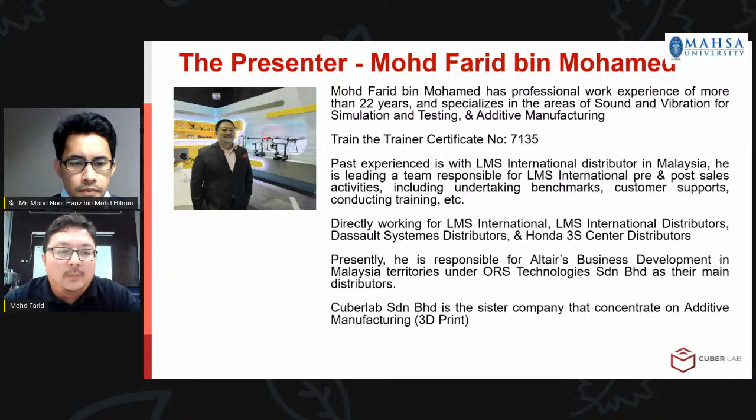All right, so I guess Mr. Hariz has already read my biodata about myself, so I don't think I need to explain much about myself already. Just a quick one, I have a lot of past experience on simulation and testing, and now on additive manufacturing.

The agenda for today is essential skills for additive manufacturing, design processes, types of analysis for simulations, optimization discipline, topology optimization, and additive manufacturing process flow, industry application, additive manufacturing design challenges, lattice structures unique for 3D printing, and another example of topology optimization and additive manufacturing.

I've mentioned there are 6 essential skills for additive manufacturing, or some people just call it 3D printing. If you look at these essential skills on the slide, one of them is conceptualization and also design optimization, which I've highlighted in blue color. The rest I'm not going to highlight. So today is more on simulation driven design, focused on conceptualization and design optimization.

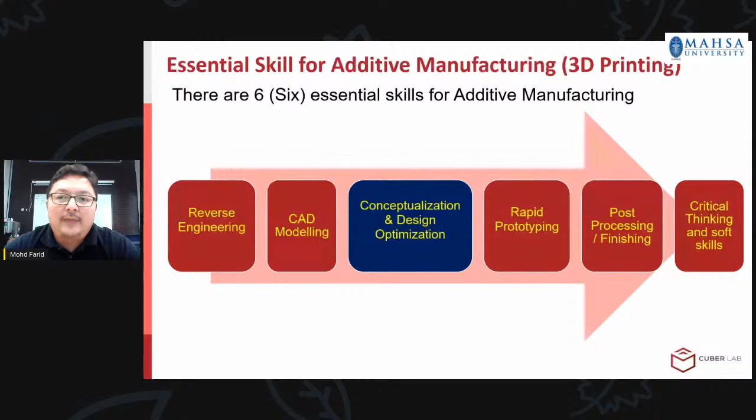Let's look at the traditional design processes. In the early stages of designing, you develop a concept - concept 1, 2, 3, however many concepts you have - and then you design that as a hand sketch, really the old traditional way. From there you build a detailed design, then go into validation and prototyping as well as documentation, a lot of paper documentation, and then you go into production. This traditional design process is a very long and tedious process because it involves designing on paper, prototyping, and real product evaluation and testing.

Just some pictures I would like to showcase, of what it looked like before we had CAD software available in the market. This is how it looked before computer aided design assisted us in designing. AutoCAD was released in 1982, and that's where we started to see an abundance of computer aided design software solutions available.

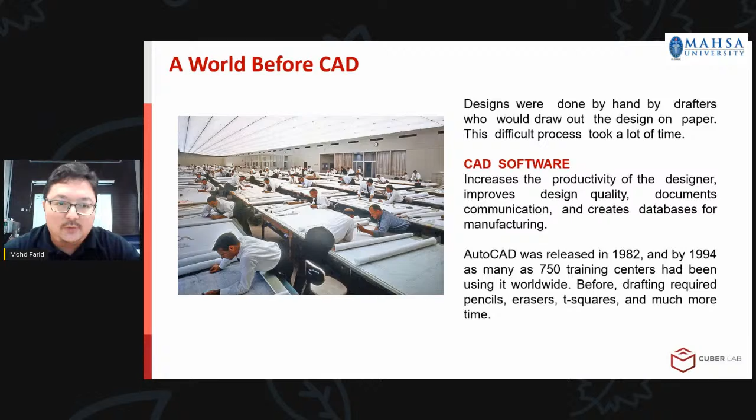I already mentioned conceptual design, so I want to give the meaning of conceptual design. What is conceptual design? It is an early phase of the design process in which the broad outlines of function and form of something are articulated. It includes the design of interactions, experiences, processes, and strategies. Common artifacts of conceptual design are concept sketches and models.

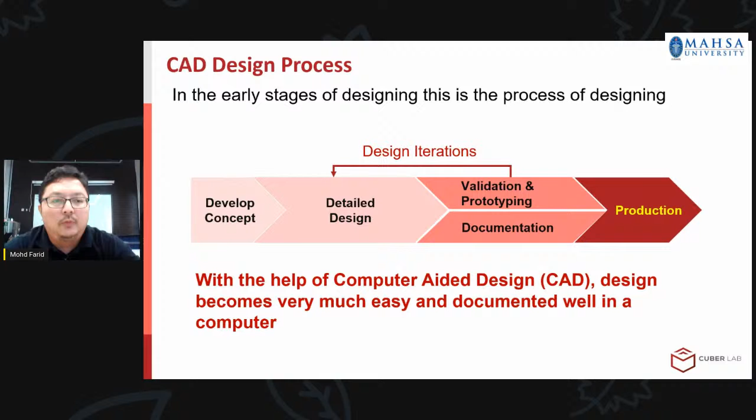Now what is computer aided design? Computer aided, the word already makes you understand it's aided by computer, and design means you are designing in computers. So that's what computer aided design is about. You also have what they call computer aided industrial design. These are two different entities, but it's the same thing - you are doing design. One part is parametric modeling, the other part you just do freehand sketch.

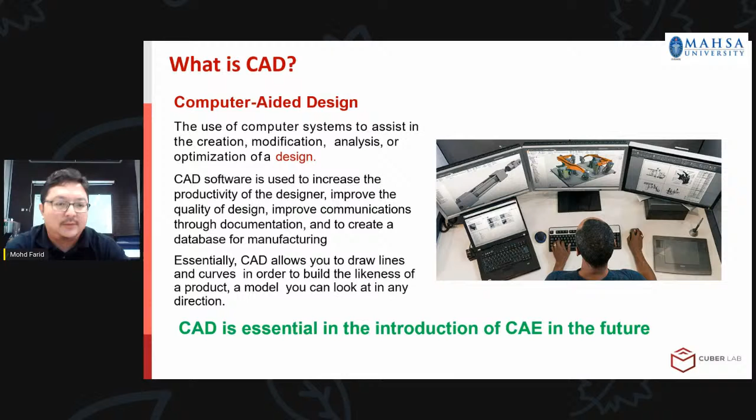I highlighted that CAD is essential in the introduction of CAE in the future, because when you have the soft copy of your model in your computer, you can use this model to go to the next level, which is computer aided engineering, where you do your simulation and analysis to find the result of your product - is it going to fail or is it going to pass? I'm going to explain more about CAE later in a few more slides.

So I'm going to show you the process of computer aided engineering design process. I already showed you the CAD process - now it's the CAD and CAE process. If you look at it, the design iteration is still available there. Let me use a laser pointer - you see there's design iteration here. So from development, concept goes to the detailed design.

This is in CAD, and then you want to validate, so you go into CAE. If you're not happy with the result, if it fails, you go back to detailed design, redesign it, and go back to CAE and do your simulation until you get the right or passing mark for the model. Then from there you go into prototyping and validation - validation is more on the testing part of the design process. Documentation is where you keep your files and result files in your computer. Once you're happy with this, you can go into production.

So what is computer-aided engineering? I've already mentioned computer-aided is aided by the computer, and engineering is more about doing simulation and analysis of the product that you have already designed. A typical CAE process comprises pre-processing, solving, and post-processing steps.

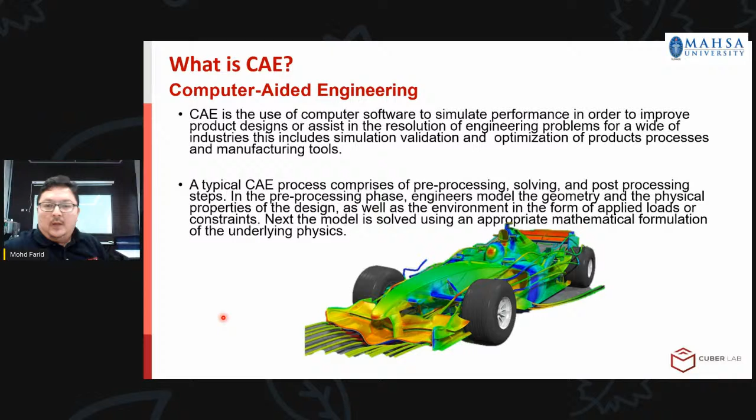Next slide - I want to highlight finite element analysis. There's a little bit of difference between what CAE and finite element analysis is all about, but most computer-aided engineering solutions use finite element to do their own solving, except for typical multi-body simulation, which doesn't need finite element analysis at all - meaning you don't have any mesh for your analysis.

If you look at it, finite element analysis is a numerical method for solving problems of engineering and mathematical physics, based on the idea of building a complicated object with simple blocks, or dividing a complicated object into small and manageable pieces. It's useful for problems with complicated geometries, loading, and material properties where an analytical solution cannot be obtained. Finite element results are validated with either analytical solutions or experimental studies.

FEA process overview - I want to show you the process of doing a finite element analysis. You can see on the right slide here the analysis type, the material properties, the loading, the boundary condition, and also the mesh generation. These are the steps.

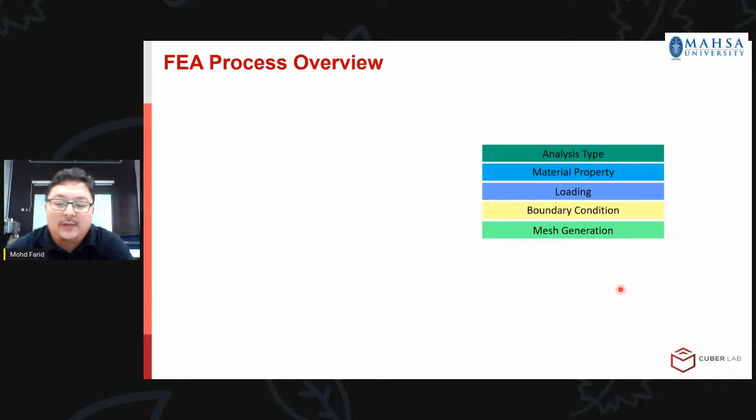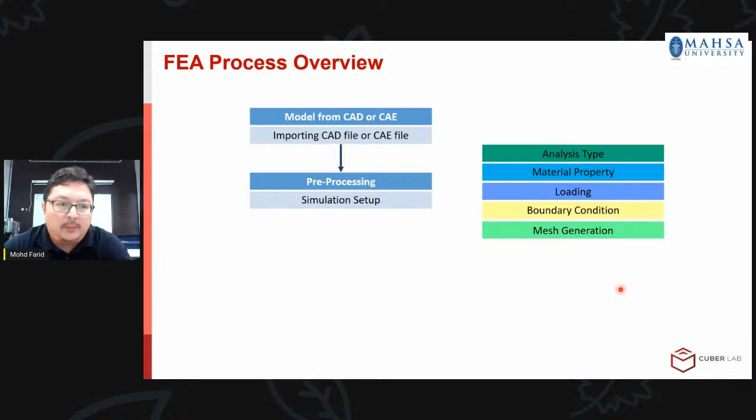You import your CAD model, or your CAE model, into your finite element software, and this will be the pre-processing simulation setup. Then you go into solving - you choose what type of solving you want: linear, non-linear, explicit, non-explicit. Then you do post-processing, and you look at your result.

So in that pre-processing, again, I already mentioned the analysis that you want to do - you want to do static, linear static, linear dynamic, heat transfer, CFD, and whatever.

Then you put in your material properties, your loadings, your boundary conditions or constraints, and then you actually go for the mesh generation.

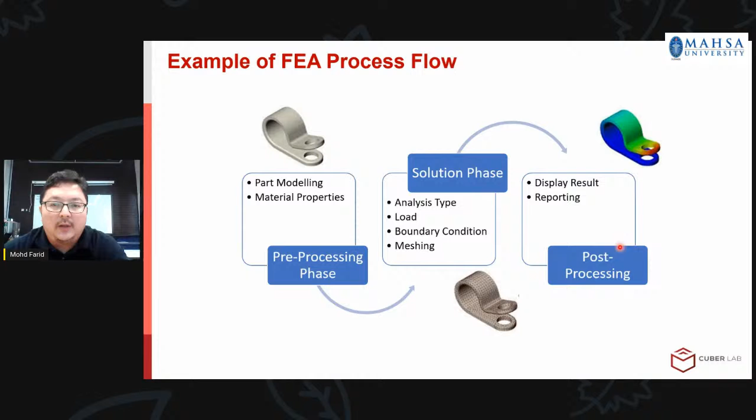Example of an FEA process flow, as shown in the previous slide. This is roughly what you can see: you put in part modeling, material properties, the solution phase, all the loadings and boundary conditions, and conduct the meshing. Once the result finishes running, you can display the result and do your own post-processing and reporting.

But roughly what it will look like is something like that in your head, while you're figuring out what you want to do with the model you are analyzing.

I've already mentioned the types of analysis. The only one that is not using finite element is motion analysis, or multi-body simulation. The rest, I would say, mostly use finite element analysis in their CAE process.

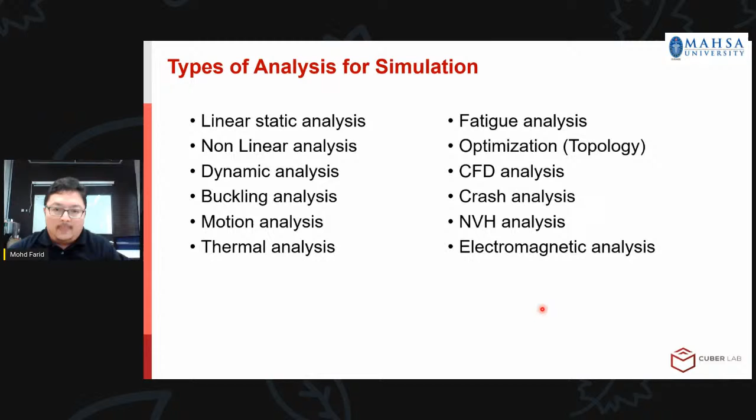Now let's go to the simulation-driven design process. With the introduction of topology optimization, the flow process is somewhat the same, but inside this design iteration, when you use topology optimization, you do not need to think about how to design your product. You can make a big block and then run topology optimization with the constraints and loading that you put in.

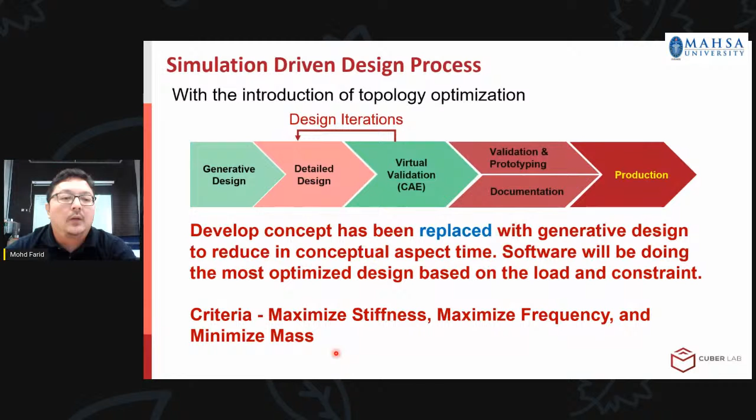The software will give you the best design for criteria such as maximize stiffness, maximize frequency, and minimize mass. So the software itself will do the job for you instead of you doing conceptual design with concept 1, concept 2, concept 3, concept 4, concept 5, and so on. With this software, you don't need to think about doing that — it gives you the best design for the loading and constraints you provided.

I want to highlight why this is essential, because of advanced users of 3D printing or additive manufacturing. If you are a basic user, you only download the model from the internet, do your slicing in the slicing software, and print. That's the basic user.

The intermediate user designs their model in a CAD software, then slices and prints. But for the advanced user, there is one additional area they do, which is optimizing the design to make it better in strength, weight, and stress. Just wanted to highlight that.

Now this slide highlights the optimization disciplines. There is a lot of optimization available in the market, but you need to understand what you are actually doing. If you look at this slide, for concept design, you can see that topology, free size, and also topography are used.

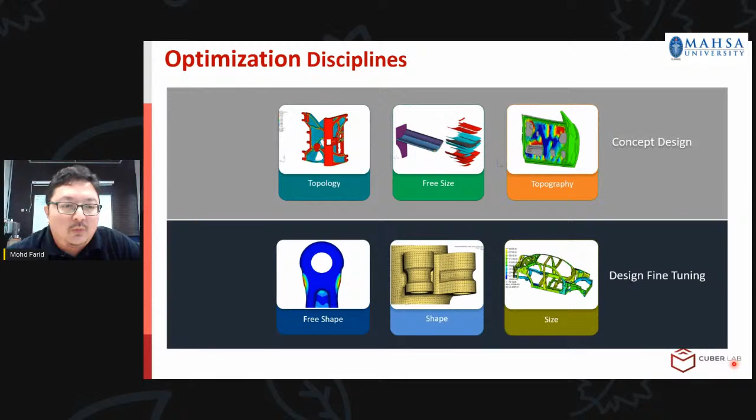As the statement goes: as a consequence of primary shape variation and continuous loading, or even due to loading alone, bone changes its inner architecture according to mathematical rules, and as a secondary effect, governed by the same mathematical rules, also changes its shape. That's what topology optimization is all about.

I've also mentioned topology optimization — what is it all about? Most simulation tells you if a design will meet performance criteria, but topology optimization creates designs that meet performance criteria. This is a very basic, simple video showing that this big block here is actually the model we want to design.

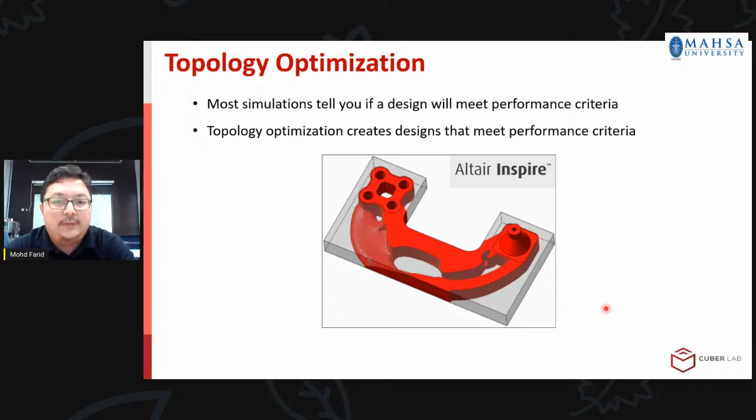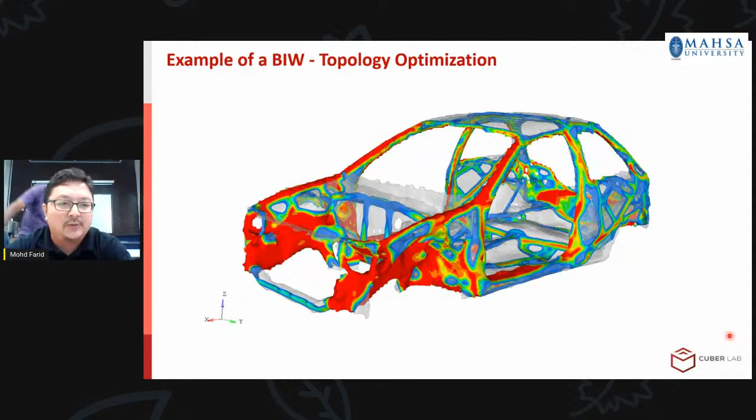Here is actually a slide just showing a sample example of a body in white topology optimization, so you can actually see how the software works. You can have a body in white, and from that body in white, you can run optimization software and get the best design that fulfills the loading condition and also constraint conditions. Thank you.

This slide here, topology optimization and additive manufacturing process flow. You can see here in prototyping, so you go for a requirement. These are the load identifications with multi-body dynamics. If you use multi-body dynamics, you almost get the real loadings instead of using an assumption loading. And then from there, the topology optimization will do the job for you, also considering all the manufacturing constraints.

And then after that, you do your polynurbs. I will not mention this slide about polynurbs in too much detail, but the gist of it is actually going into this design and making it smoother. So that's the function of polynurbs.

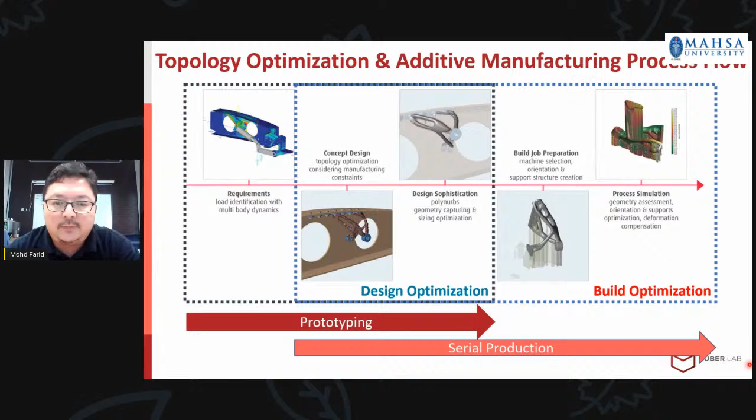And then we have, in serial production, you will see this optimization here. This is actually a picture of a 3D printed job done, and we do optimization in the solution. So there is available software that can even simulate additive manufacturing processes for metals.

And I have this video here showing the whole process of topology optimization and additive manufacturing process flow. So do enjoy.

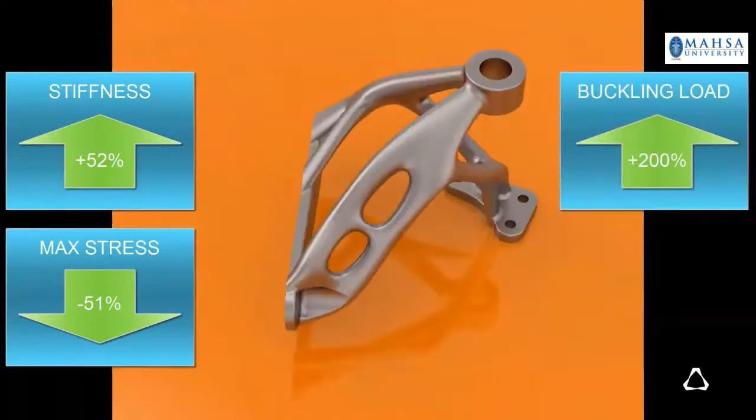Okay, a very short video of the process flow. At least you get some understanding of what you can actually do with the solution that is available in the market. All right, I'm going to go to the next slide now.

Again, topology optimization and additive manufacturing. Topology optimization inherently generates designs suited for additive manufacturing. It's good to have this 3D printer available in the market now, because I believe the topology optimization design has already been in the market for many years, probably 20-30 years ago.

But the problem is the manufacturing processes constrain all the design that can be designed. With conventional manufacturing, you cannot actually manufacture the design that you wanted. So with the coming of 3D printing, you can actually print anything, any design. Just want to highlight that in this slide here.

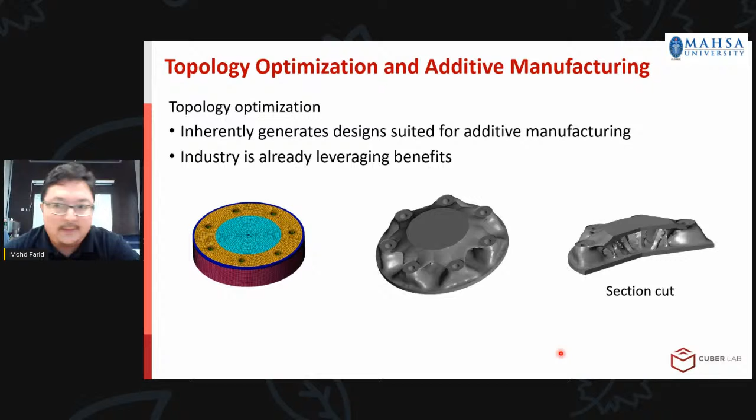All right, again, mentioning additive manufacturing and also topology optimization. You can see these are complementary technologies, right? The geometric freedom - so you have the freedom to design whatever you want instead of too much constraint on the geometry. And then it injects innovation.

That's really good actually. It also has this design individuality. So because the design is so much like nature, it has its own individuality of the model that you have already designed.

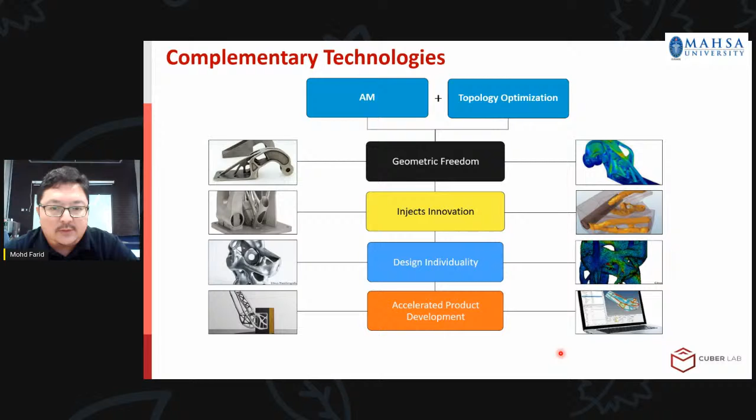And then it provides you this accelerated product development. Yes, that's for sure, because if you want to do your conceptual design, you have like 1, 2, 3, 4, 5, 6, 7, 8, 9, 10 concepts per se, let's say. That would take a lot of time to design, time consuming. So with that simulation driven design software solution, you can actually cut down on that conceptual design.

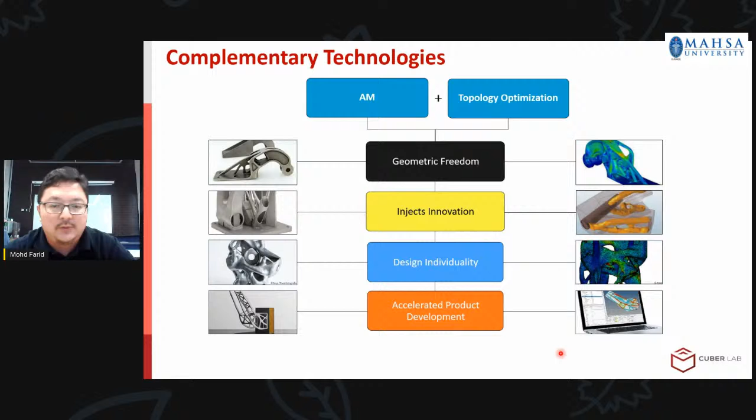All right, again, I've already mentioned the optimization solution available can also incorporate the manufacturing processes. If you look at this slide here, this is a bigger picture from the previous slide. You can see without and with the maximum member size, it will actually do a different kind of optimization design. And then we have without draw direction and with draw direction. So these are all manufacturing processes.

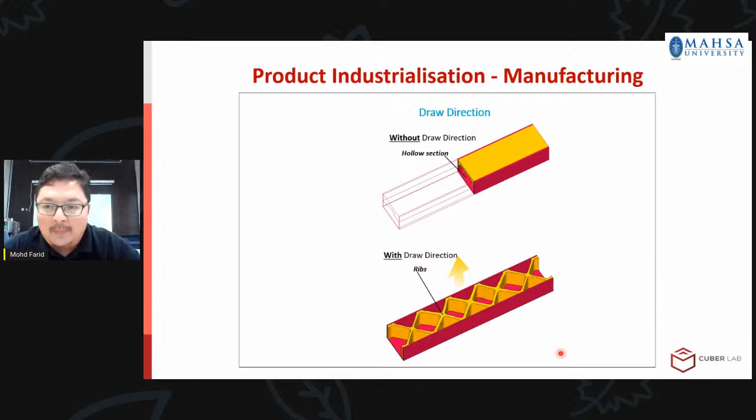And also stamping here, and also overhang angle. Anyone who has been playing with a 3D printer, this is vital - they need to know the maximum degree of this overhang angle. If not, you cannot print, you have to put a lot of support. So this red colored model here, these are all supports. The component itself is actually in gray.

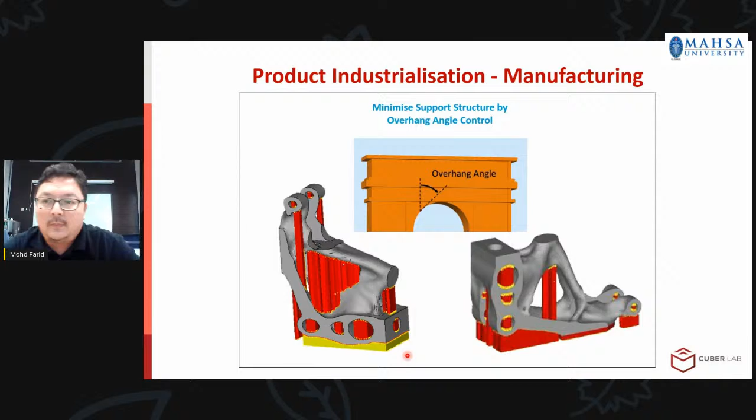Some benefits of topology optimization for additive manufacturing - again, I've already stressed this many times. You can do cost reduction via reduced part count, reduce your cycle time, reduce your weight, reduce your cost. Rapid prototyping and testing also reduce because you don't have too many conceptual designs. Many companies are already leveraging the technology and expertise in topology optimization for additive manufacturing.

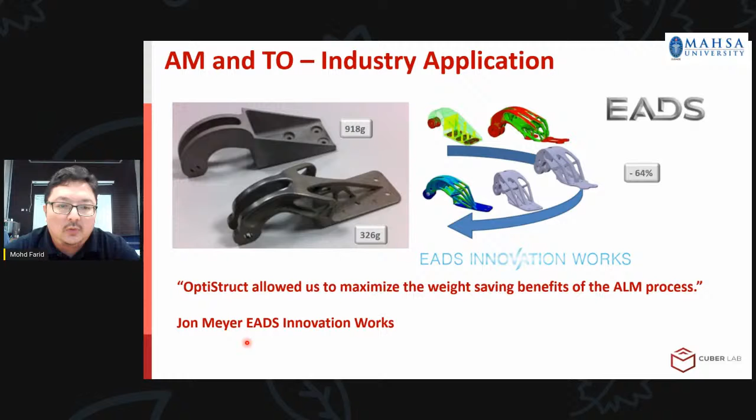I'm going to show you an example here. This is from EADS - if you look at it, AM and TO. AM stands for additive manufacturing and TO stands for topology optimization. You can see here from 918 grams to 326 grams, that's a reduction of 64% of the mass. It says OptiStruct allows us to maximize the weight saving benefits of the ALM process - this is from Jon Meyer, EADS Innovation Works.

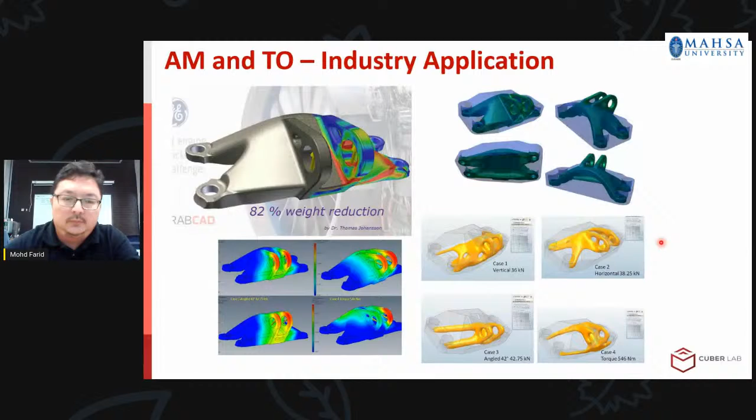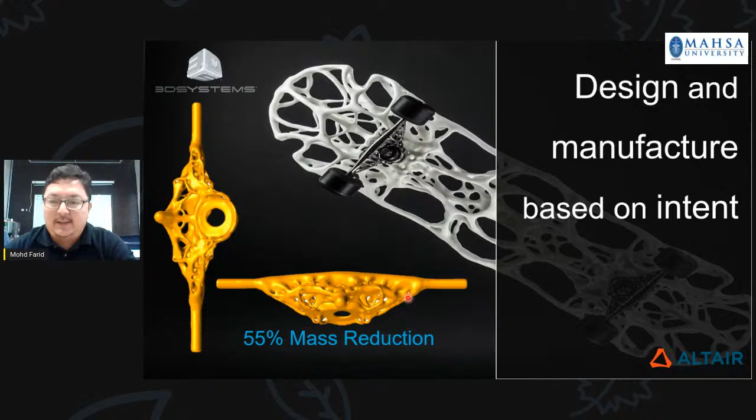That's another example. I'd like to show this next slide, because this is something - when I was young, I used to skate, so now they have a new design of a skateboard. Very nice. If you look at this slide, it says it has reduced 55% of the mass of this skateboard. Let's see this short video, I think it's only probably one minute plus. So enjoy.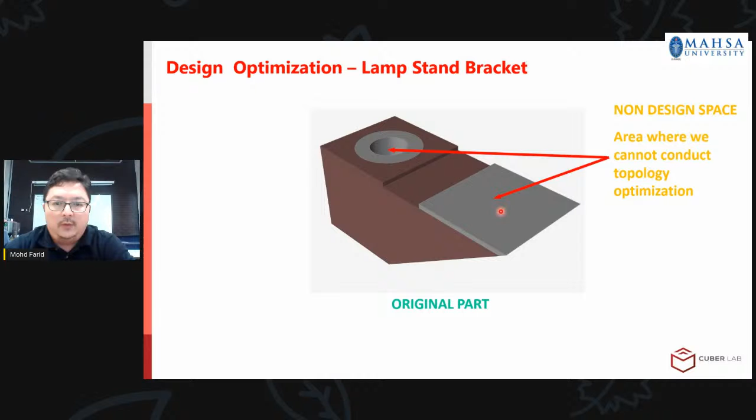Okay, first things first, what we need to do is simplify the part. Inside the software available, you can have your own CAD software available as well, that you have to simplify the model. Simplifying it by doing a very simple model design like a trapezium here, where you define this non-design space - this is where you put your constraint and your loading, those are the areas where you cannot remove material. And the design space, this is the area where we can conduct topology optimization - the brown color is the area that can be reduced.

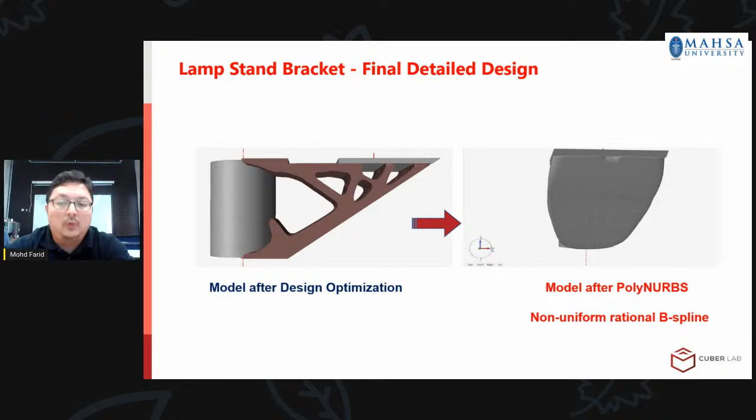So now I can mention what is NURBS. Actually, non-uniform rational B-spline model. So this is what happened.

I've already redesigned the bracket, and from that bracket I reduced the maximum displacement magnitude by 50%, and I also reduced the mass by 10%. The goal wasn't to reduce the mass because it's still light. My goal was to make sure that it doesn't fail when I actually use the model.

You can see the original model has too much localized stress, whereas the optimized model has very less stress around here, but only at that constraint or the holding bracket there.

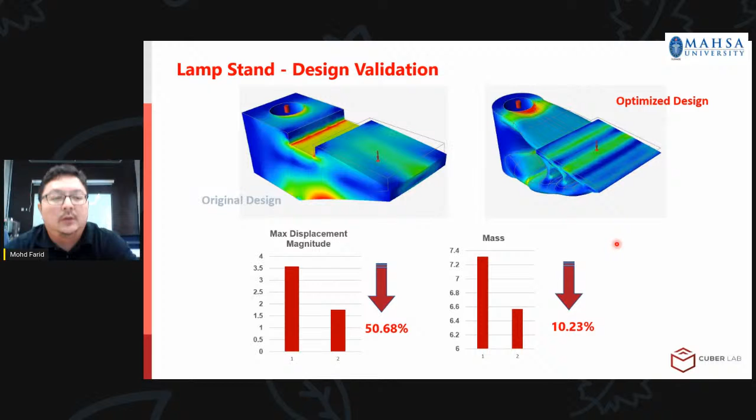This next slide here is just showing that after we designed and optimized the model, we actually 3D printed it. So enjoy.

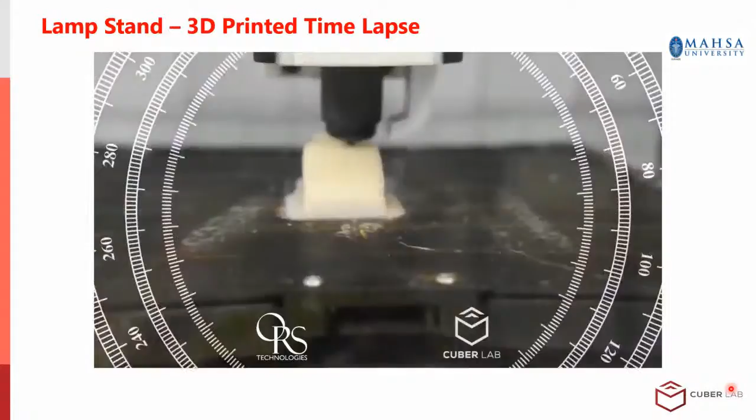Okay, that's the video of the printed part. So you might wonder what kind of material I use. I use ABS because the original material is ABS. So we actually print this in ABS material in our office. And then I'm gonna show you a next slide on how it's being used.

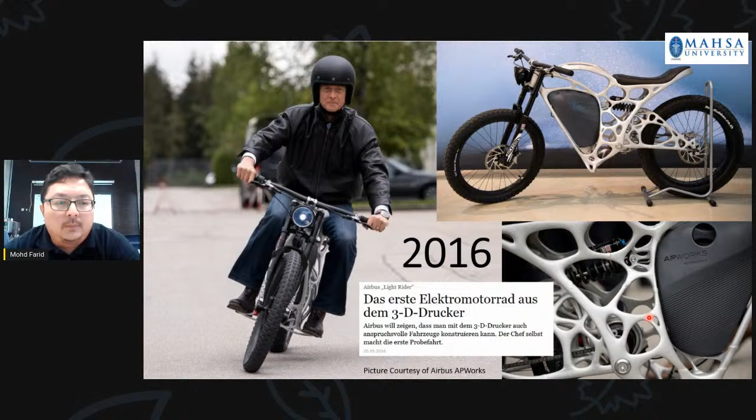So this is for APWorks. They designed the structure of the motorbike using a topology optimization solution. They used topology optimization and then printed it out with a metal 3D printer.

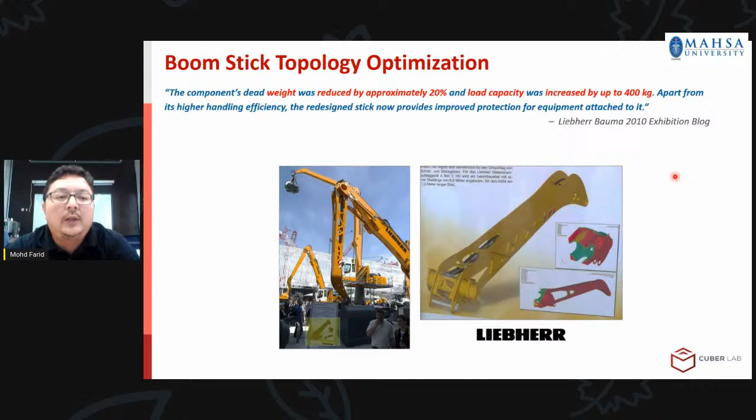Another example, Liebherr. They reduced mass by approximately 20%, and load capacity was increased by 400 kilograms. So even though they already reduced the weight, they also increased the capacity of that component itself.

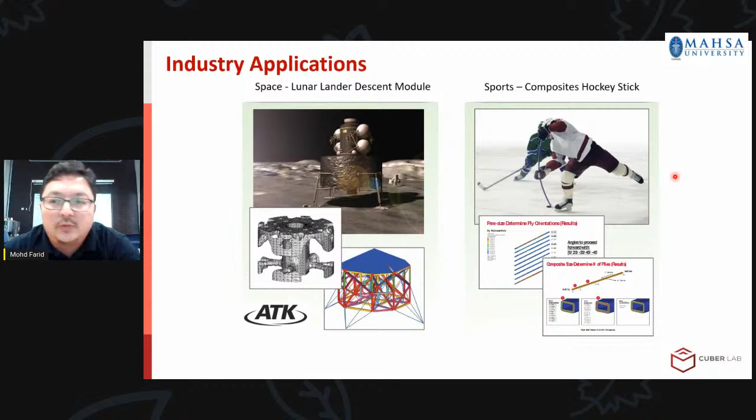Now, I would like to also highlight the design challenges in additive manufacturing. There are three design challenges. First, how can a designer come up with the best possible shape? Two, how can the engineer draw it in a CAD system? And three, how to consider the new manufacturing constraints.

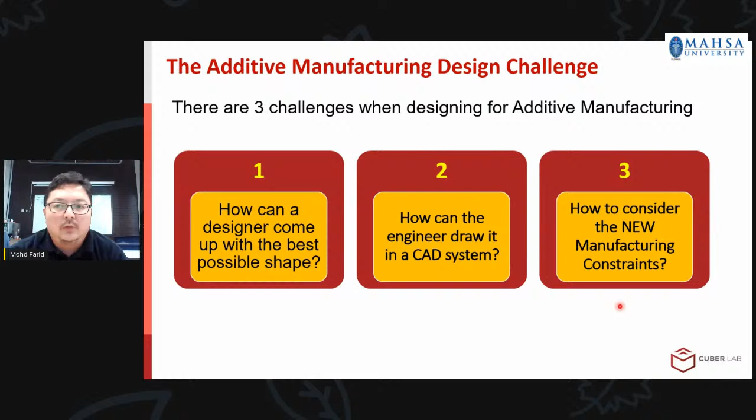I think I've already mentioned number one, if I'm not mistaken. So number one, how can a designer come up with the best possible shape? I guess the solution would be topology optimization. So that's solution one.

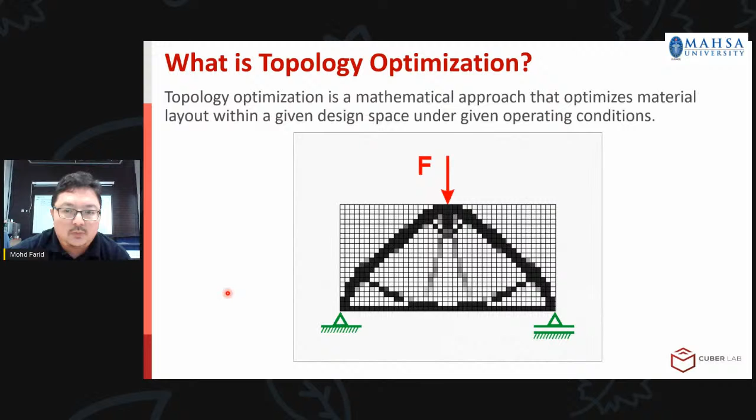And again, I will mention what topology optimization is, but this is a better picture for understanding what topology optimization is all about. You can see these are the constraints, and that will be the loading, and this is how the software will run the simulation to get the best design for this loading and the constraint that is given. So that's what topology optimization is all about.

Okay, so again, technology symbiosis. Topology optimization provides the most efficient structure for a given load condition. But for traditional manufacturing, designers always have to trade performance for manufacturability—those are the constraints that they have. But with additive manufacturing, there are no constraints on designing. I think I've also mentioned that earlier.

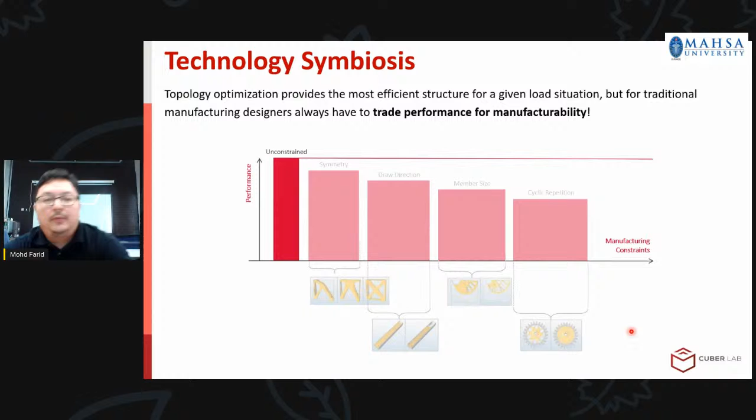And then we have the second design challenge: how can the engineer draw it in a CAD system? The problem with the conventional CAD system is that it relies on Boolean operations of simple geometric entities. So drafting sometimes like this can take a week with conventional systems.

So just an example here. I'd like to show you an example of a valve block redesign, from VTT Technical Research Centre of Finland. They wanted to do optimization on this part. When they do optimization, they get this result, then they smoothen out the model, and then do analysis, and this is what they got. They got an optimal fluid flow and a 67% weight reduction. That's really, really good, and they didn't go at all into a CAD solution.

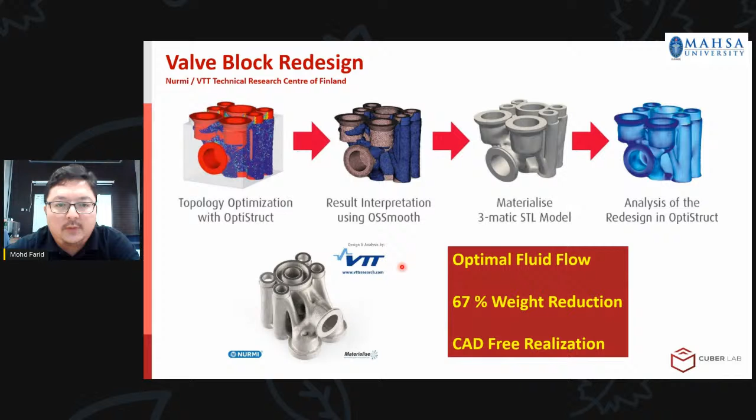So they just redesigned it inside that simulation software. That challenge's solution is actually hybrid modeling, direct plus Boolean, and then the new PolyNURBS design technology.

So PolyNURBS is now being talked about. I have a short video of how PolyNURBS works. It's only 11 seconds, please have a look. This is how you do PolyNURBS.

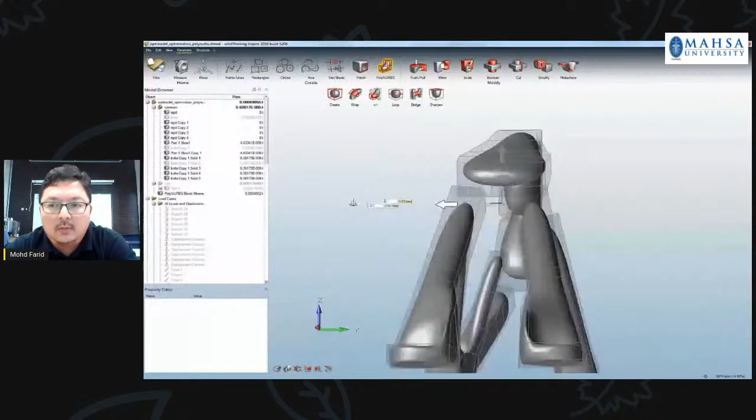Once you've done that with PolyNURBS, it will become something like this. If you are a designer, I think this would be easy for you. And you have to have a good graphic card for your computer to actually play around with this. Finally it will look something like that, and from that design of your PolyNURBS, you do your analysis.

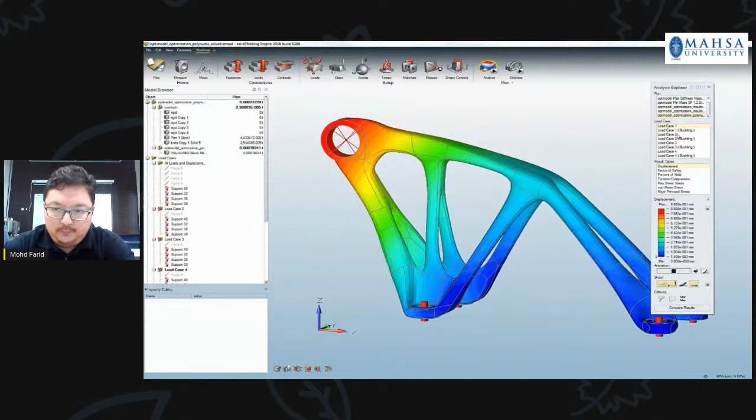And then the other challenge is actually considering the new manufacturing constraints. So you have a type of support, downward facing surfaces, you have the angle surface, and these are the things you have to consider for the new manufacturing constraints available in additive manufacturing.

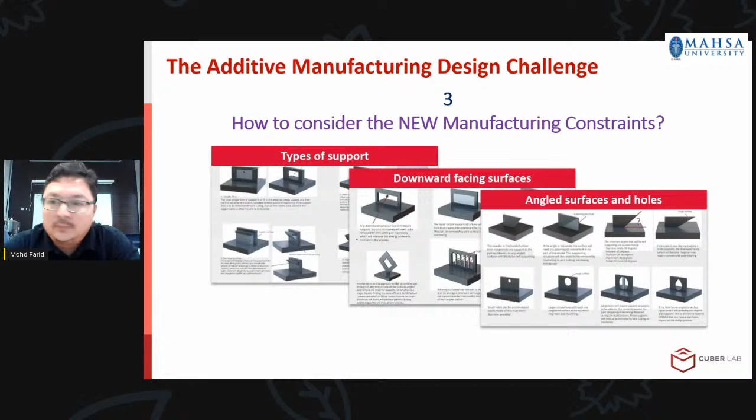I'm going to go to the next slide now. This slide shows how you want to reduce your support structure. These are some of the constraints I've already talked about, that when you want to do printing, especially FDM types or even metal 3D printing of FDM types, you will have this problem of supports. Unless you're using SLS, I don't think that will be too much of an issue because SLS does not need support.

So yeah, these are some of the constraints you have to look into and consider. Again, how to do that? Solution number 3 is by actually going on design rule catalogs and manufacturing constraint implementation.

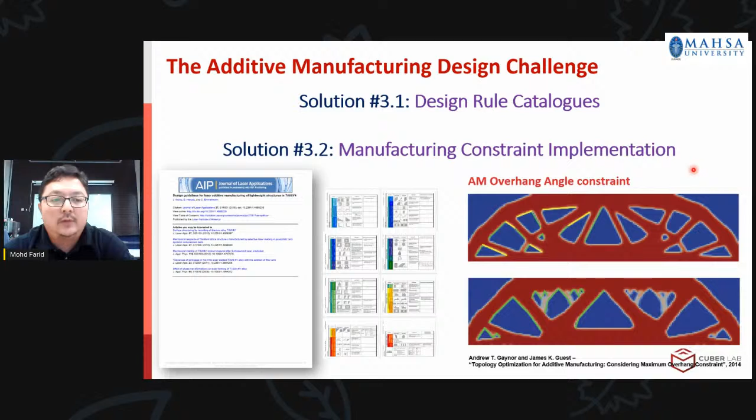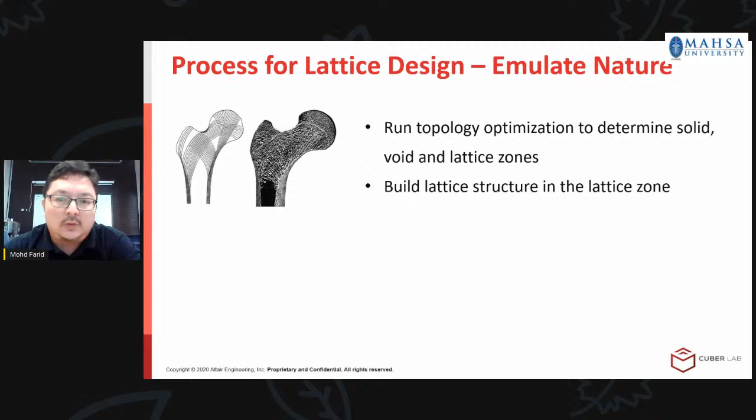So again, the process for lattice design is to emulate nature. You run topology optimization to determine solid and void lattice zones, and then build the lattice structure in the lattice zone.

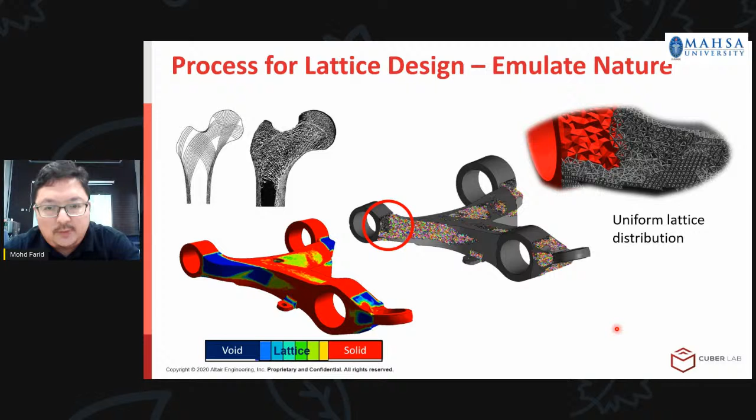This picture here shows the red in color is actually solid, and the void will be in blue, and in between those are the lattice structures. You can actually see some lattice structure in between those, distributed evenly there. So again, you can do topology optimization, and then after that you can do a lattice structure of the model that you have.

This slide mentions again, as I already said, that you do a two-phase optimization process. One, you do topology, and after topology, then you can actually do lattice structures. With that, you reduce a lot of material waste on your model.

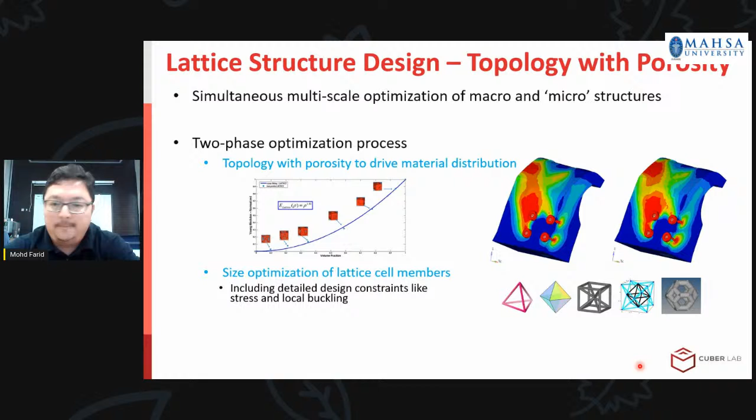Next slide, just want to showcase a control arm. Concept design to lattice design, the same picture, yes. So you do analysis on that. Phase one.

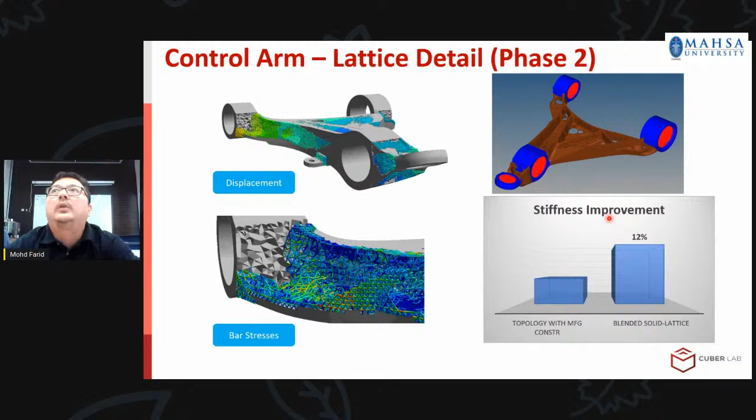But then you run the void, solid and void analysis. From there you can see all the lattice structure, and that will be a clearer picture of that model - much clearer, all the lattice structures here. And from there you do your analysis to look at the displacement and the stresses available for that lattice. So if you look at this topology with manufacturing constraint, blended solid lattice, the stiffness has already been improved by 12%. So that's also good.

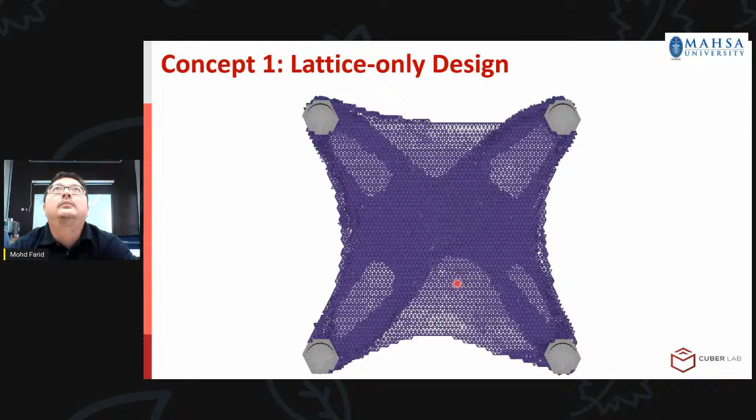Again, this is the spider bracket, lattice design variation. Just want to show you again how it's going to look like. This is for lattice only design. You see all the models are all on lattice.

And then this one is internal lattice structure design. So internally, you will see that there's lattice structure inside. On the outer layer, you see like a solid, but inside is lattice structures. And concept number 3 is the blend between the solid and also the lattice design.

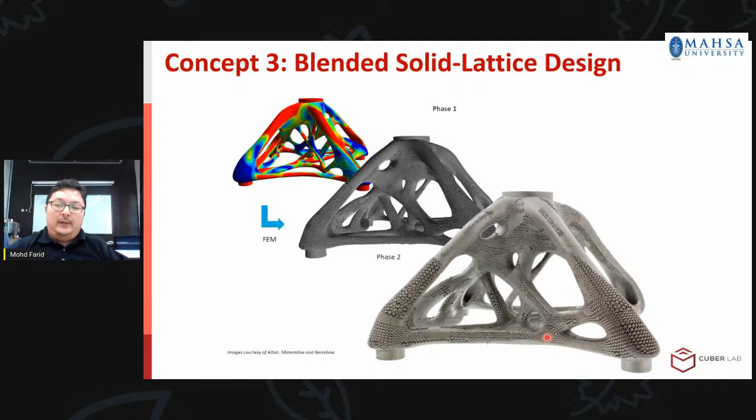This is from Renishaw, Materialise, Altair, and also Renishaw - the model that they actually have designed. This is a spider bracket, and that will be the last, or concept 3 design, that they actually have already chosen.

So from design to manufacturing: you have design, and then you prepare, and then you build that in your metal 3D printing. That's an example of lattice and also topology. I think I would end this presentation by showing you one more example of topology optimization and additive manufacturing.

This is actually a satellite antenna holder - so this part here. What they wanted to do is actually reduce the weight, of course. Satellite, aerospace, they all want to reduce weight because they don't want to consume too much fuel. I guess it would be an animation video. Just showing this is the original design.

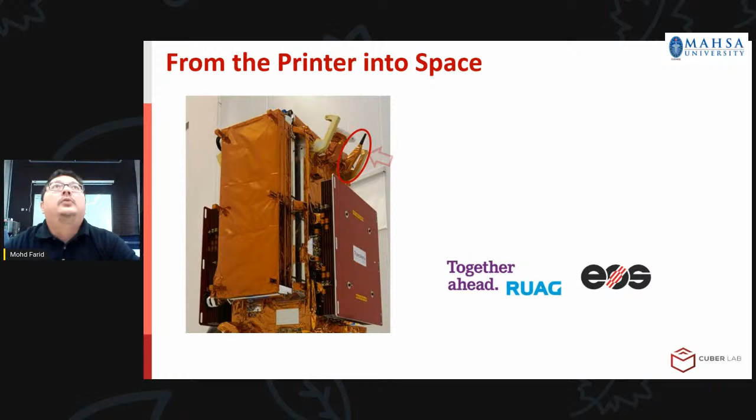I'm going to show you the slide there. Again, this is a picture showing how it looks like and how it is being called. So what has happened? It has reduced the weight from 1.6 kilos to 0.9 kilos, so that's about 43%. It even increases the natural frequencies of the model, from 70 hertz to 90 hertz - I'm assuming this will be the first mode. And then it has also improved the static behavior, the strength, the stiffness, and also the stability of that antenna holder.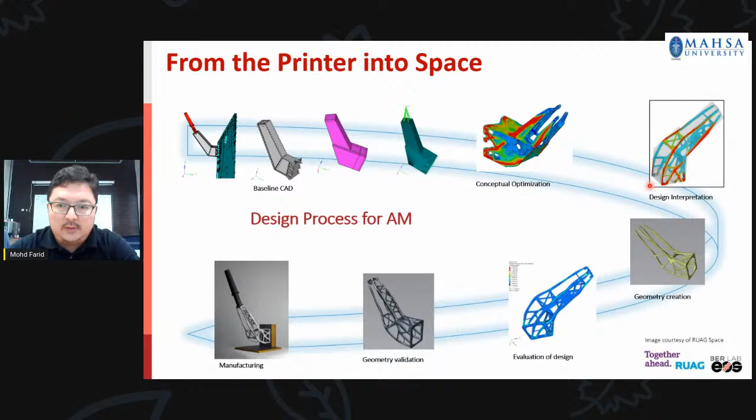So again, the process of AM: you see baseline CAD, and then conceptual optimization, design interpretation, geometry creation, evaluation of design, geometry validation again, and then you go into manufacturing. The process is quite clear. I'm just going to show you this - the model process, model preparation.

You can actually see the process on top - these are the model preparation steps. So understand design requirement again, proper meshing, proper boundary condition, and also proper optimization definition. You have to define what specifications you want to have - so higher eigen frequency, that will be higher natural frequency of that model. Hard mounted boundary condition - those are the dimensions that is given, and the weight of the antenna is actually the load of that component itself to cater for.

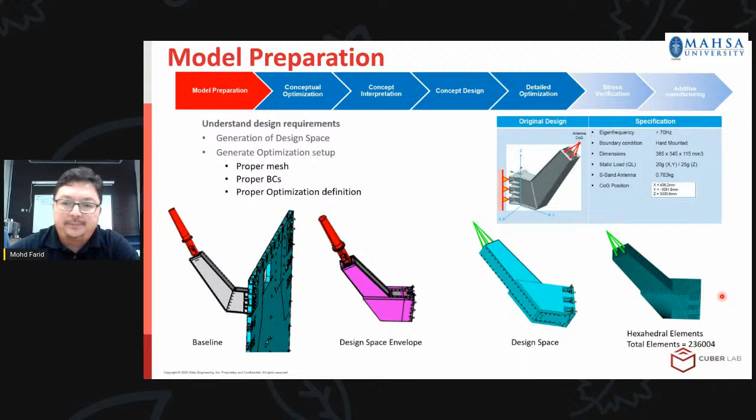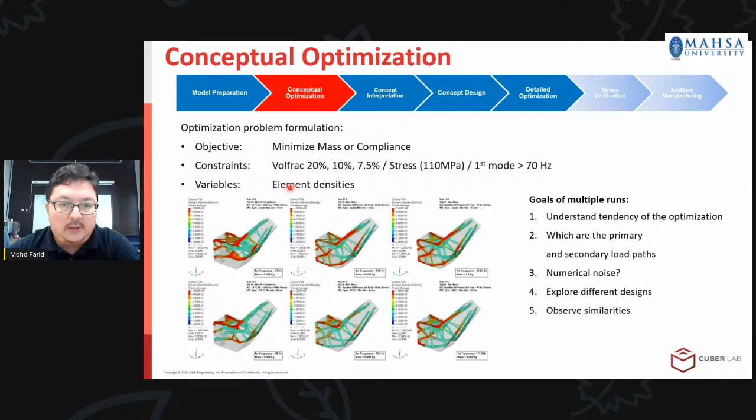Then you go into the conceptual optimization. From there, what is your objective? I've already mentioned there's three types - you have maximize stiffness and maximize frequency. This one is minimize mass. So those are the constraints and the element density. They actually do a lot of iteration on it.

And from there, they go into the conceptual interpretation. I don't think I want to go in detail here. Then from there you have that conceptual design. It just says that Inspire helps realize the process of creating a CAD model 3 or 4 times faster than the traditional CAD tools - parametric modeling and traditional surface modeling techniques.

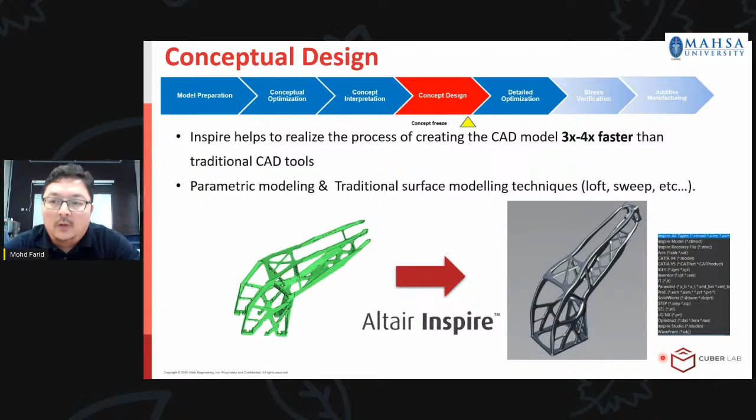So loft, sweep - these are things you can actually do inside the software. You can directly export to all the native CAD software available in the market - you can see there Catia, they also have SolidWorks, Unigraphics, etc. From there, that's where they printed it.

So you can actually see, if you are doing this - I think I've already shown the video of how you can use simulation to simulate how it's going to be printed and where is the right support. So they have actually done that - that's the optimized support available for that antenna holder, and from there they printed it out and then did a lot of finishing, and that will be the final product.

Okay, last but not least, once you already design, you still have to do testing. In the aerospace industry, they run sine sweep and random excitation control. For the first eigen frequency, which is the first normal mode, they run it in simulation and get 91.44, but in test they get 90.9, which is really close to the real result.

For the second eigen frequency, I'm assuming one of them will be bending mode and the other torsion mode. The second eigen frequency or normal mode is 106.9 in simulation, and in test they get 107.6, which is really close. So they have already succeeded in this redesigning of the antenna bracket using topology optimization and additive manufacturing together.

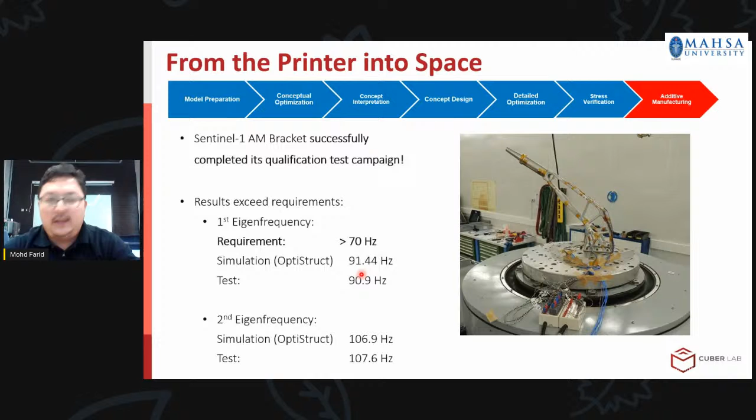I'm not sure whether we have question and answer because I'm only allowed for 1 hour live. Okay, Mr, thank you so much. You're welcome. Actually we got this one question. Maybe it's simple, okay. I have shared the screen.

Okay, this is Muhammad Nazrul. He's asking: I am using AutoCAD 2007 and I know this version very well. Some updated version is going on, so can I continue with 2007 or do I need to change to the updated version? It's just for the AutoCAD.

Oh, this is for design. Okay, if you talk about design, I guess if they can read the model, I don't think that would be an issue. But if they cannot read the model, then you have to update them. Because sometimes when you have a newer version, like the newer version of this topology optimization software, you cannot read the old version. So you need to upgrade to actually import your model into your simulation software. So I guess that should answer that question.